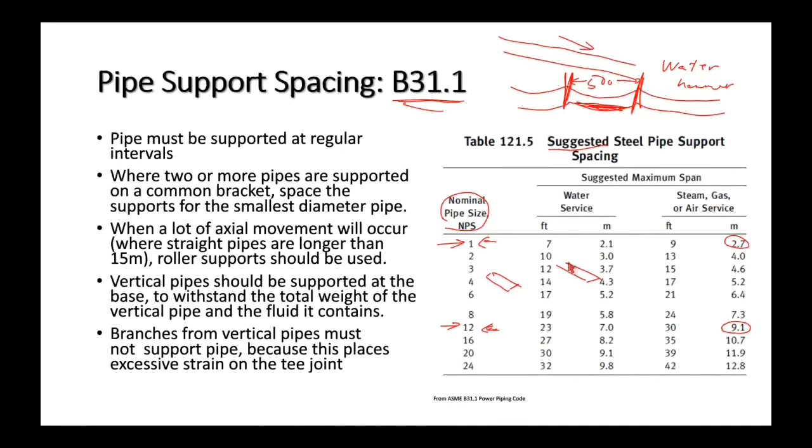So what happens if we've got some pipe runs? I've got these flat supports with threaded rod going to beam clamps, and say I've got a 4-inch pipe being supported there, and also a 1-inch pipe along the same supports. So the 4-inch and 1-inch pipes are both on the same tray, if you will. Well, then what we do is set the interval, the spacing between those supports, to accommodate the smaller size of pipe. We just accommodate the weakest of the pipes.

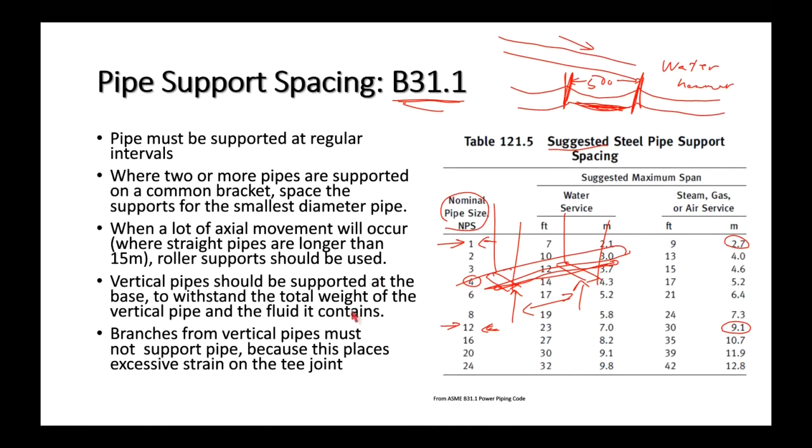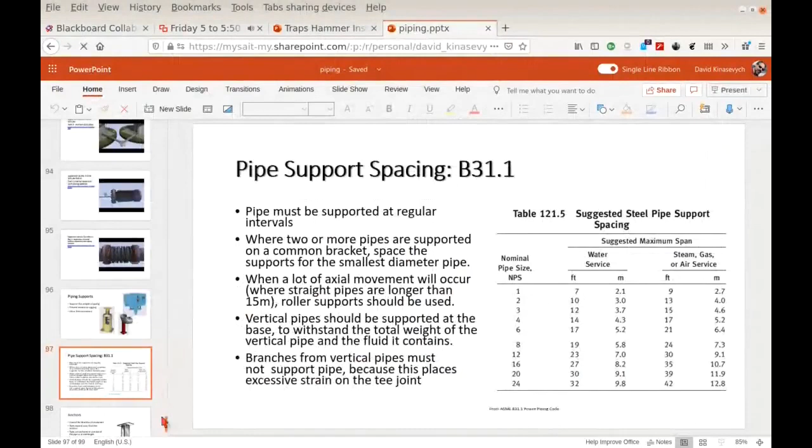There's an anchor. We know about anchors, we saw the video, so I'm not even going to talk about anchors and guides. I think those videos we looked at did a really good job of that stuff, so I'm not going to go over it anymore. You can rewatch the videos, those little 1-minute videos.

And that's it for piping. You should know the purposes. Why do we have steam traps? Of course, we want to discharge accumulated condensate, but we also need them to vent non-condensable gases. Those non-condensable gases are air on startup and also CO2. And some people might wonder, well, where the heck is the CO2 coming from?

Let's say we've got a sodium zeolite softener, Na2Z, and what happens is we've got dissolved solids, scale-forming compounds, entering the sodium zeolite softener. Let's say that happens to be magnesium bicarbonate, MgHCO3 twice. What we end up with is the non-scale forming compound: 2 NaHCO3. That's sodium bicarbonate, that's baking soda. It doesn't form scale in the boiler, but the bicarbonate decomposes in the boiler to form CO2 gas.

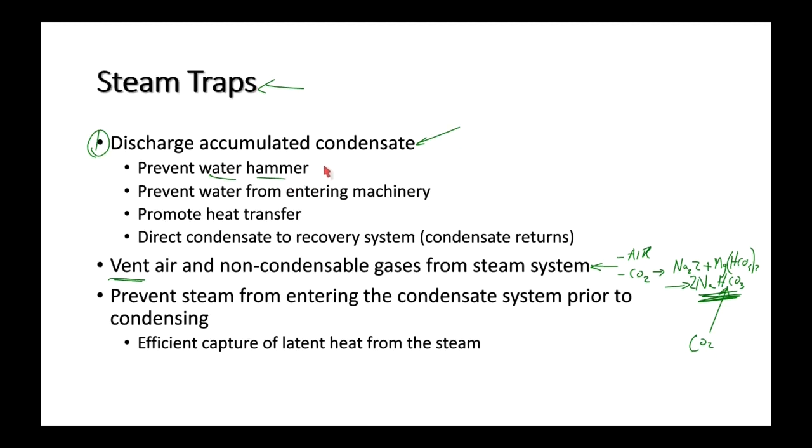So let's take a look at this again. Let's go back to number 1, discharge accumulated condensate. What happens if we don't? Well, we're going to get water hammer, okay? Water hammer occurs whenever we've got saturated liquid and saturated gas together in that same pipe.

Now then, the next thing is we want to prevent water from entering machinery. So let's say the condensate is a slug of water upstream of a turbine.

Break the turbine. Now, promoting heat transfer: if we don't remove condensate, let's say I've got a heat exchanger here, and I'm going to put some steam in there, and it's a shell and tube heat exchanger, so I've got a whole bunch of tubes. And that steam is going to condense and give off its latent heat, and then we want the condensate to leave. But what happens if we don't remove the condensate as it forms?

The condensate builds up and builds up, so that instead of having 100% of the heat transfer surface in service, we end up with 70% of the heat transfer surface in service, and then 50, then 40, and 30. Before you know it, we've got this thing full of condensate, and it's just not transferring heat the way we want it to. So we want to maximize the heat transfer surface all the time, and if we're not removing the condensate, we are going to diminish the heat transfer.

Now, what do they do with the condensate? It goes to some kind of recovery system, and maybe we could add this as an altogether different thing, but you see, condensate recovery is very important because it's basically pure water. As such, it makes very good boiler feed. So we want to recover it.

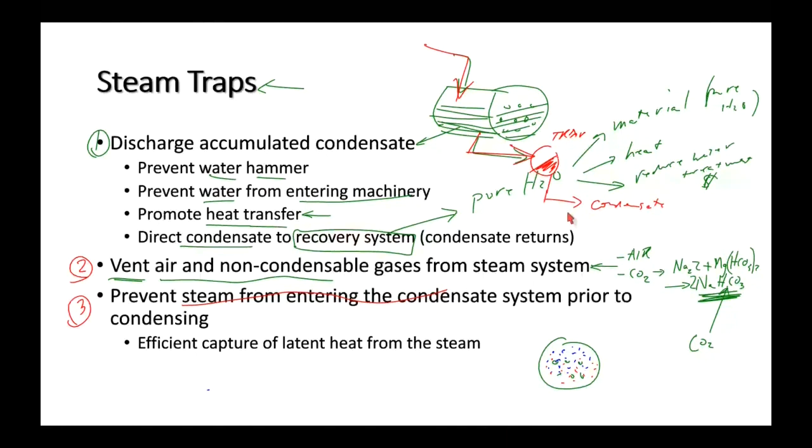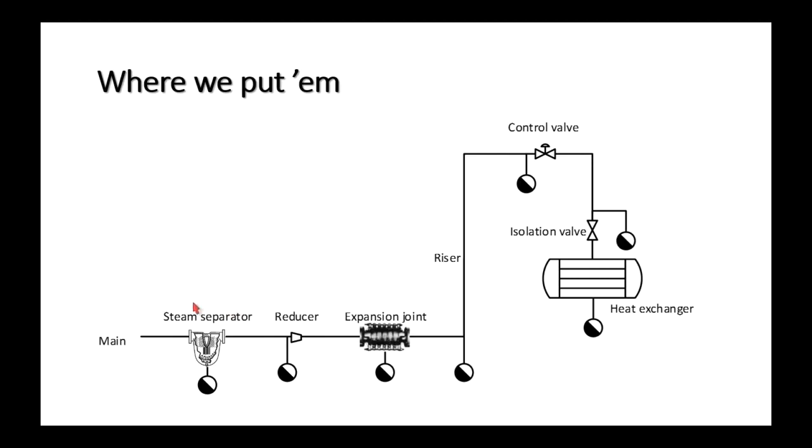So that's the long and the short of it, of why we have steam traps, what they do, and why we need them. I'm not going to go into too many details, except we're going to take a look at some of those operating principles in detail and see how each one of these traps maximizes and works on those particular concepts.

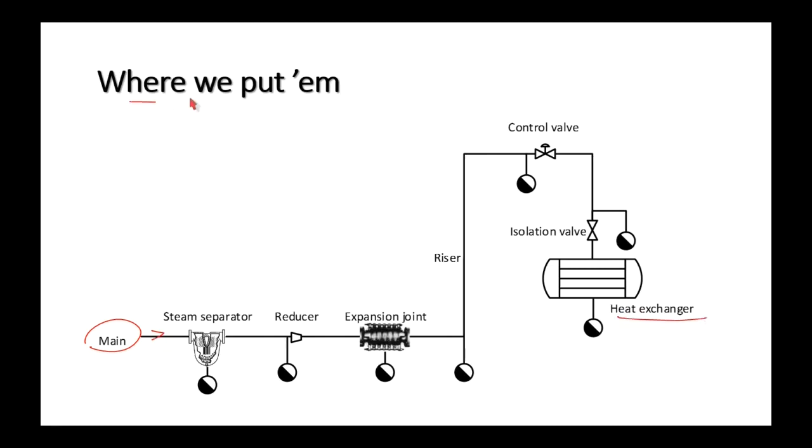So here's a steam main, the steam's going that way, and we've got a heat exchanger over here. So where do we put them? We put them where we've got a steam separator. Let's say I've got 95% dry and saturated steam going into the steam separator, and leaving the steam separator, maybe I've got 98% dry and saturated steam. What happens is the steam separator is going to get a little bit of liquid buildup in it, which we want it to do. So we're going to put a trap, and we're going to discharge the condensate from the steam separator. Very good.

Now here we've got a reducer, and reducers are pretty interesting because there are lots of different kinds. Let's say we've got a 4-inch NPS4 over here, and here we have a 2-inch steam pipe. So we have this fitting. And I got to tell you right now, we don't want to do that, because condensate is going to form a pocket right down there. So that's kind of no good. What we really want to do is take a 4-inch and have an eccentric reducer.

It's a little bit of a different fitting. Instead of having the pipes on a common center line, what we have is the 2-inch pipe down here on its center line, and the 4-inch pipe center line is a little bit higher. What we have is a smooth bottom that will not collect condensate. That being said, you will find concentric reducers in your piping systems on your steam lines, and you're going to go, who is the idiot that put a concentric reducer there? That's wrong. But if they are there, you can solve it by sticking a trap over here where the condensate could collect.

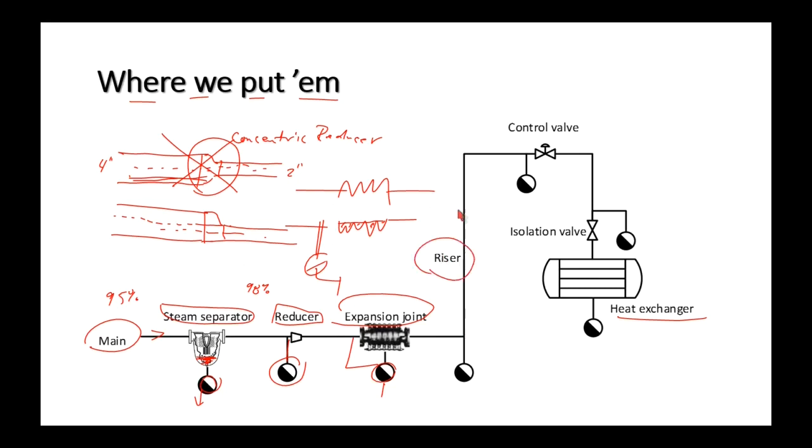Where else do we find them? Here's a riser. And at the base of a riser, we have this thing that we call a drip leg. That's terminology you probably should know from last year, but if you don't, now you know what a drip leg is. At the base of the drip leg, we're going to put a steam trap because, of course, as this pipe warms up, it's going to form a lot of condensate. Even in normal operations, there's going to be heat radiating. Even though it's an insulated pipe, we will see heat radiating from the pipe, and we're going to form condensate. We've got to grab it at the low point, which is the base of the drip leg, and again we discharge the condensate.

Now here's one: a control valve, or we could even say a regulating valve. Maybe we've got a steam pressure regulator. Just upstream of it, we're going to have a steam trap. So here it happens. Think of this control valve as being on-off, so it's either going to be open or it's going to be shut. Now, I know those would be the extreme conditions in terms of its modulating action. Maybe it's fully modulating, maybe it's open-shut, maybe it's a solenoid valve. I don't know, but regardless, it is some kind of control valve.

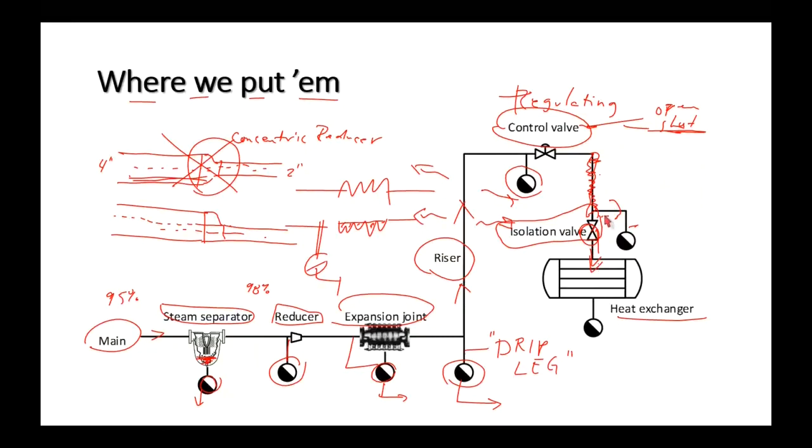Over here we have an isolation valve. If you're starting up the steam turbine powered boiler feed pump, you'll notice there are steam traps positioned just upstream of the isolation valve. Condensate will build up in this pipe, and if I open that valve, I'm going to have a slug of water wrecking the downstream equipment. We don't want that. So because the isolation valve may be closed at certain times, we want some way to collect that condensate and drain it out on an ongoing basis.

The last thing here, where there's a heat exchanger, we want to confine the steam inside of the heat exchanger, vent air out, and make sure only condensate leaves, but we also have to remove the condensate as it builds up. So yes, in heat exchangers, but also think of another piece of equipment you folks are running, a steam turbine. The steam turbine has casing drains at various locations to prevent condensate from building up inside the casing and demolishing the rotating blades. So here are some of the places where we put them and why.

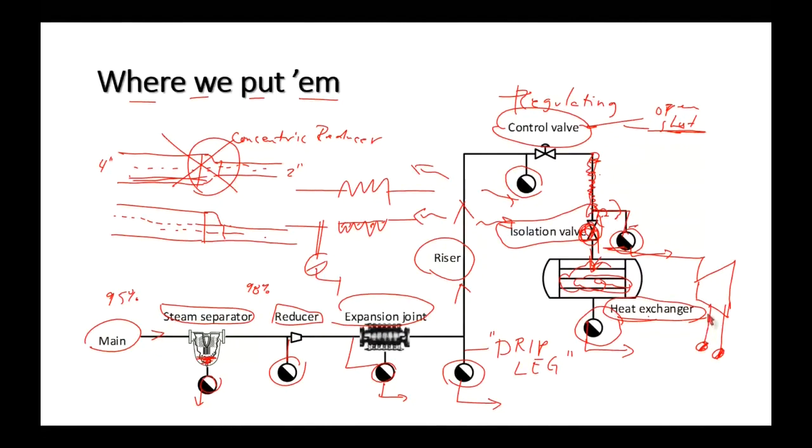Now as for operating principles, we mentioned in that Kahoot thermostatic, mechanical, and thermodynamic. This is a bit of a different approach. What we have is a sensing element. Think of instrumentation, think of a primary sensing element, and think what that sensing element is sensitive to. As for a thermostatic trap, we've got an element sensitive to a temperature difference between steam and condensate.

Now that is a bit of a problem, and the reason it's a problem is you think of steam and condensate being at the same temperature. If I've got steam at 200 degrees Celsius and that stuff condenses, what do I end up with? I end up with water, condensate at 200 degrees Celsius. Well, how can you have a thermostatic trap that is somehow sensitive to a difference in temperature? Well, there is no difference in temperature. 200 is 200, whether it happens to be steam or whether it happens to be water or condensate.

So in order for a thermostatic trap to work, the condensate has to cool off, it has to become subcooled. So maybe then we have a trap that opens at 180 degrees Celsius. That is the temperature difference that a thermostatic trap works on. It works on this whole notion that condensate must subcool for there to be a difference in temperature between it and the saturation temperature of the steam. Now it can actually differentiate: is there steam present, or is it only condensate?

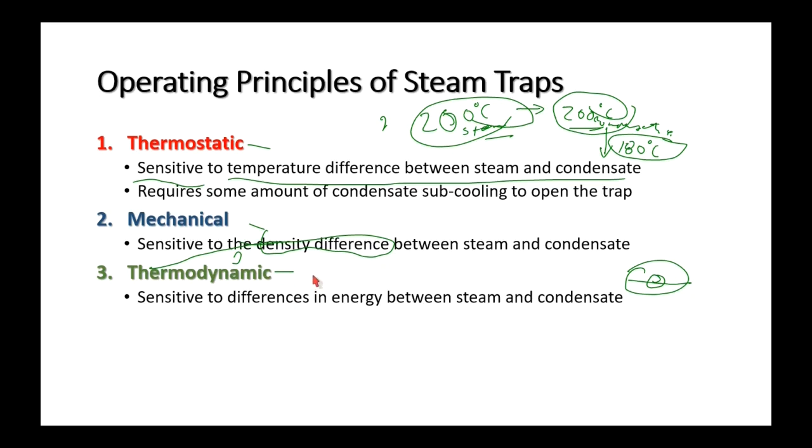Okay, so here are all thermostatic traps, and I'm going to use red here indicating that it's thermostatic. So what we're going to look at is a bellows type of trap, the liquid expansion trap, the bimetal trap, and the balanced pressure trap. Now, of these, the balanced pressure trap is not in your Pan Global, but it's very, very important and you need to know about it. Also, the liquid expansion trap will be new to you, but that one is in your Pan Global.

Both of these are related to each other. If we take a look at the pictures, this one here is the one that's in your Pan Global - that's the liquid expansion. This one over here is not in your PG, but that's the balanced pressure. And then this one here is the radiator trap. What all of these have in common is they all have some kind of a bellows or a pressure capsule. So keep this in mind: if a trap has a bellows, it is susceptible to water hammer. If water hammer occurs in the body of the trap, it will destroy the trap.

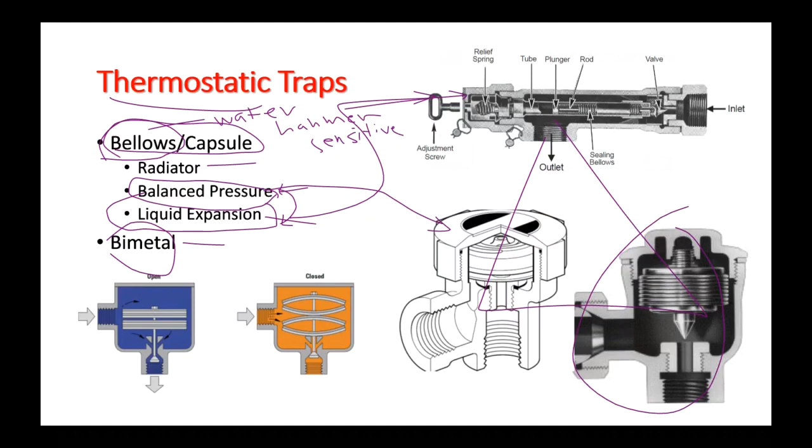And I'm back to writing with my mouse. So, water hammer sensitive - okay, I've got to find a smaller word, because otherwise it'll take me an hour to print it out with my mouse. Now, the bimetal is another type of thermostatic trap that in fact is not water hammer sensitive. So we'll take a look at those ones too, and we'll clarify some of the misconceptions about those. So here is the basic radiator type trap, bellows trap.

I don't think I need to go over this much, right?

So what we have is some kind of fluid inside that bellows, and that fluid expands when it's hot and shuts off this valve down here, and when it's cold it contracts and opens up the valve. Cold means condensate because it's been subcooled, and hot means it's surrounded by steam, which is at saturation temperature. Very simple trap, but like I said, it's got a bellows, so susceptible to water hammer.

It's fairly easy to service because there's a bonnet here, so it's threaded, and you can unthread it and pop out the pressure capsule or the bellows, and you can replace that for a certain amount of money, but it may not be worth it. You might just replace the trap altogether.

And then it does have a removable seat down here, which is also threaded. So maybe the more expensive ones are serviceable, but the smaller ones are just kind of like throwaways.

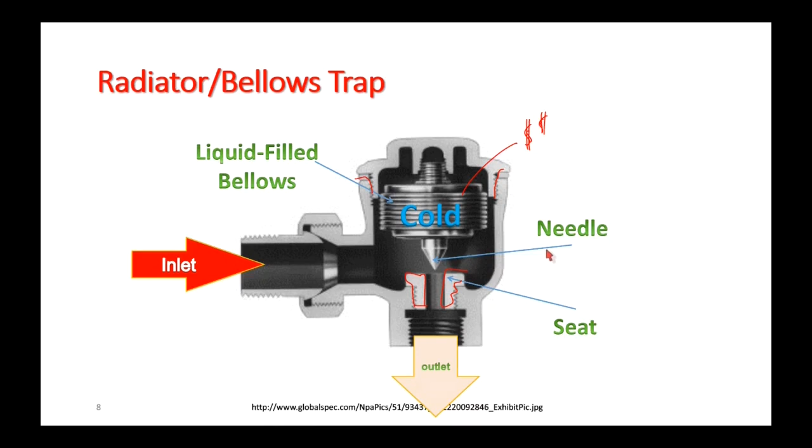Now, this bellows here, does this trap fail open or does it fail closed? And the answer is yes. It fails open or it fails closed, one or the other, and it depends upon the kind of bellows. As a matter of fact, when you buy these things, you have to order the type of bellows. You have to specify, do you want it to fail open or do you want it to fail closed? Failing open is usually the most desirable thing. Better to waste steam and energy than to have condensate backup.

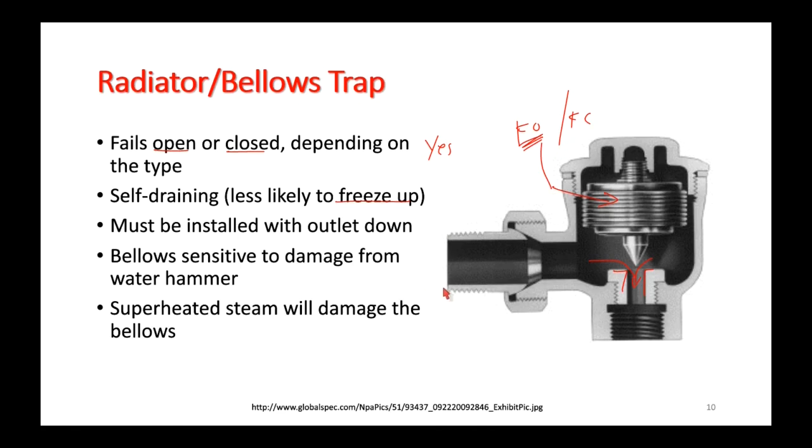Now they're always positioned with the orifice at the bottom, which means that they tend to drain automatically, which is a good thing because if it happens to be in a cold environment, it's less likely to freeze up. And that's basically our radiator or bellows trap.

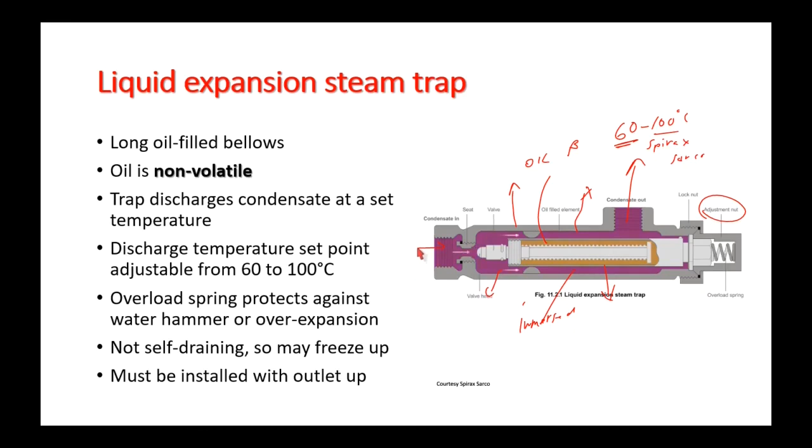So by adjusting this, we can actually control the discharge temperature. We can set it between 60 and 100 degrees Celsius, which is a real problem, because we're going to take a look at this one here. It's got a slide. Let's say that we have it set to 90, so this one's going to be set to a 90 degree Celsius discharge temperature.

Oil has a known coefficient of volumetric expansion, and so what that says is it has a fixed temperature response line. It will always discharge at 90 degrees Celsius.

But if we take a look at steam, steam's a little bit different. Steam has a temperature, saturation temperature, that varies with pressure. So as steam pressure increases, the saturation temperature increases. So this line here is our steam saturation curve, with increasing pressure and increasing temperature.

So let's say we're down here at P1, maybe this is 150 kPa gauge. At 150 kPa gauge, we've got condensate forming here at, say, 115 degrees Celsius. That means we've got a particular delta T, and so it has to subcool from 115 degrees Celsius to 90 degrees Celsius before the trap actually opens. So condensate is going to be this warm, and then the condensate has to cool off below 90 before the trap actually opens. So the subcooling then would be, what, 25 degrees of subcooling has to occur.

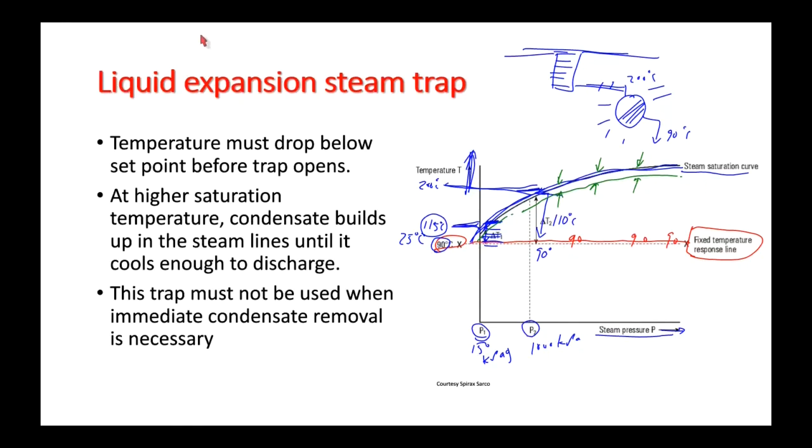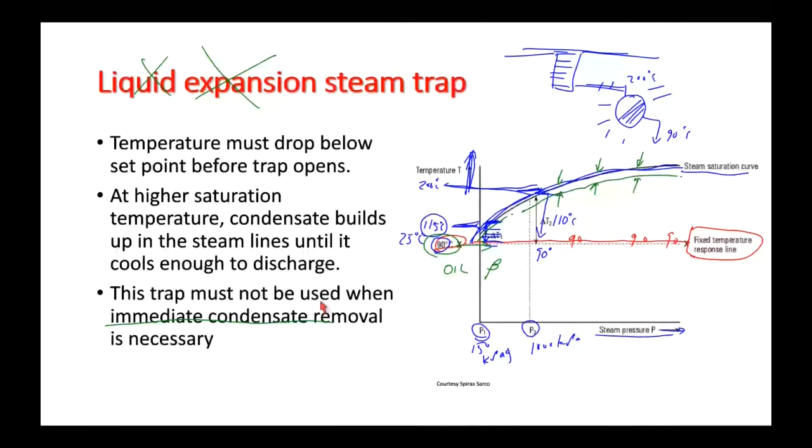It's kind of a bummer because it's got this low fixed temperature. Why does it have the low fixed temperature? Because it's filled with oil, and oil has a specific coefficient of volumetric expansion. So this type of trap is never used when we need immediate condensate removal. But what we can do is use it as a startup trap and as a shutdown trap, and that's where we see it.

So here's our steam main. We've got steam flowing through it. During startup conditions, we make a lot of condensate - maybe so much that this poor little trap here is overwhelmed. But the condensate is going to be relatively cool. When we first put steam in this line, the condensate is going to be 100 degrees Celsius when the steam main is at 100 degrees Celsius.

So in other words, when we're just filling it up with steam, we're making lots of condensate, and the condensate is pretty cool. We're going to discharge at 90 degrees Celsius. So the liquid expansion steam trap is going to be great for us. It's going to pass a lot of the condensate that forms, and it's going to help out this poor little trap over here.

Then as the steam pressure increases, and so does its temperature, maybe we're at 150 degrees Celsius, then we're going to have condensate at 150. This trap here is going to start to back up condensate because of the subcooling that it requires. And as it backs up condensate, this trap comes into play and handles that condensate alongside this one here.

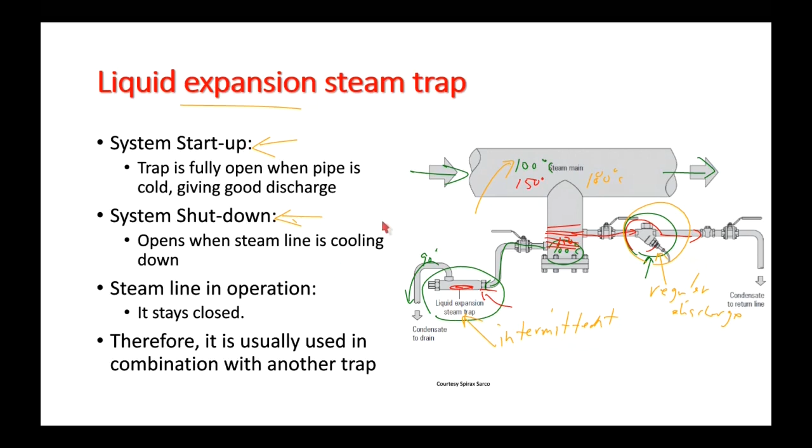So to summarize, when do we use these? We can use it in combination with another steam trap that is not a liquid expansion type, and we can use it for startup - a startup trap. We can call it a shutdown trap. I've gone into far more detail than the Pan Global goes into, because the Pan Global, as far as I'm concerned, will just leave you with questions, and hopefully this has answered some of your questions.

Now, the balanced pressure trap is the same as a liquid expansion trap, except for two things. Number one, it doesn't have an adjustable discharge temperature. And the second thing is the bellows inside, the pressure capsule, is filled with a volatile liquid. So because the liquid is volatile, it will respond to the pressure and temperature of the condensate.

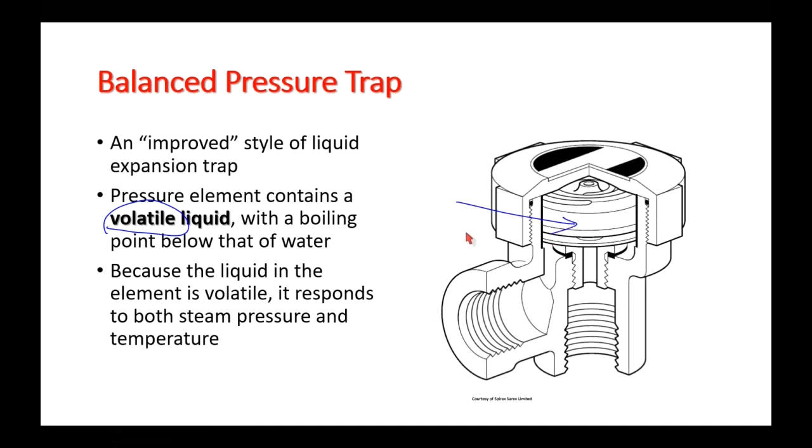So that's the pressure capsule right there, and that's our temperature sensitive element. Here's how it works. We get some cool condensate right now, so it opens up and discharges until hot condensate surrounds it. And then after it cools off, it opens again.

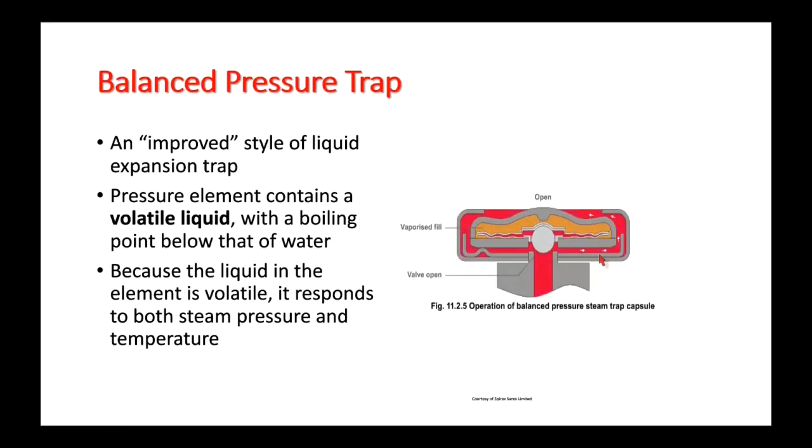Now, as for the response line, this one actually does have a response line that corresponds fairly closely to the steam saturation curve. So it doesn't matter whether we're at low pressure warming up the pipe. What we then have is, say, 15 degrees of subcooling. And as the pressure in the pipe increases and the saturation temperature increases, again we've got 15 degrees Celsius of subcooling. You get the idea.

This one actually responds to the steam saturation curve because it's full of a volatile liquid instead of an oil with a fixed coefficient of volumetric expansion. So some people call this the improved liquid expansion trap.

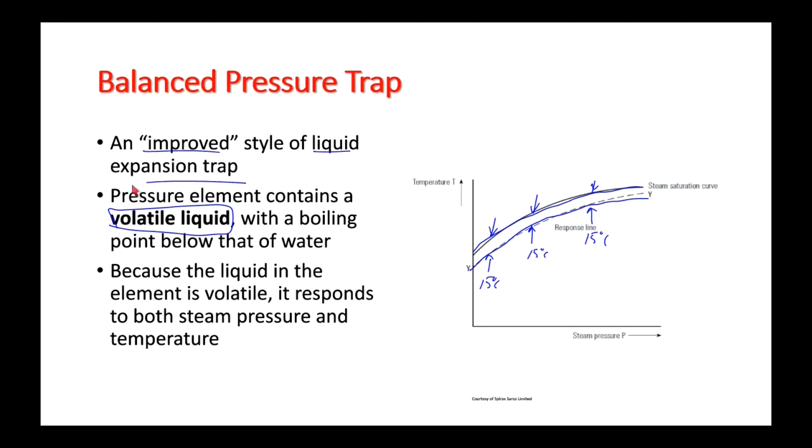Now the next is the bimetal trap, and Pan Global kind of slags this. What Pan Global says is, the bimetal is weak, and because it's weak, it doesn't close very well—it doesn't shut off tight. And who wants a steam trap that doesn't shut off? Part of their job is to trap the steam until it gives off its latent heat. But if this one is passing all the time, that's no good, right? So who wants it?

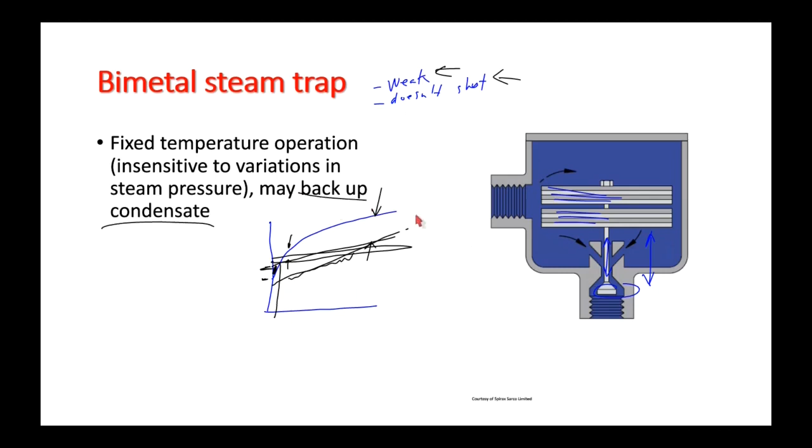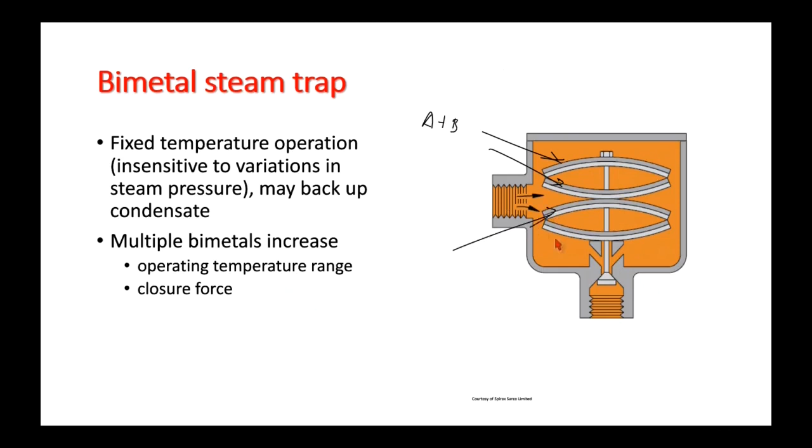But what we can do is, let's say these bimetals are of composition A, metals A and B, and we have other ones of a different composition, metals X and Y. They'll both operate differently. So what we can have is, if this is our saturation curve, metals A and B behave like that, and metals X and Y behave like that.

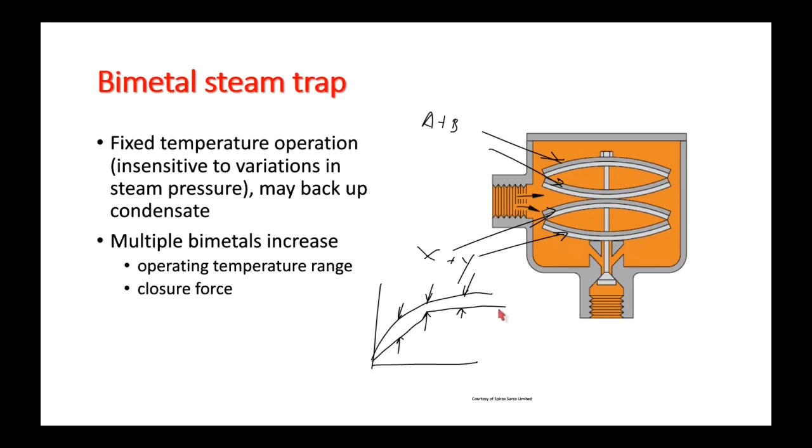Beautiful. So now what we have is, pardon me, they don't have a bellows, so they withstand water hammer—water hammer is not going to crush a bellows. They're fully open when they're cold, so they're good at venting air, and they're good at dropping a lot of condensate.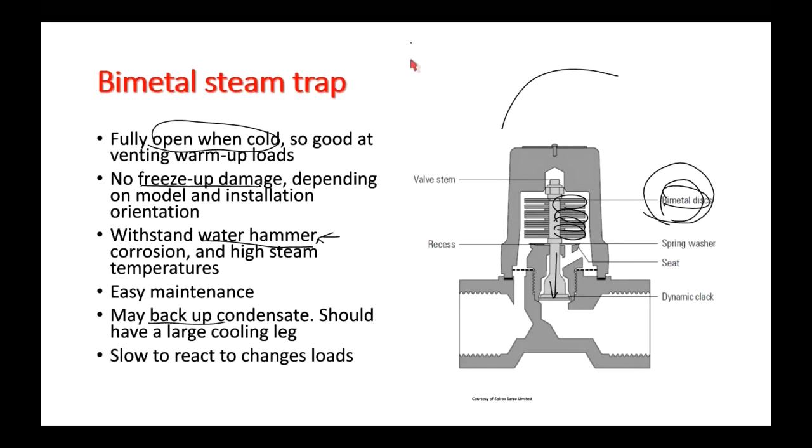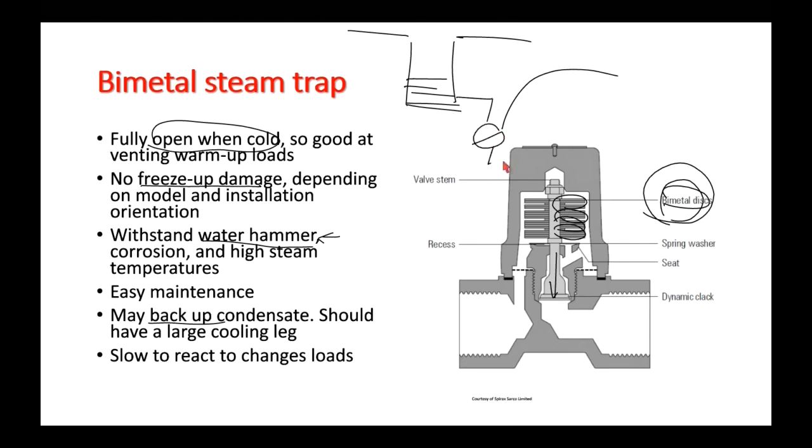They may back up condensate, but if it's a multi-bimetal type of design, it probably shouldn't. But just to be on the safe side, let's have a pretty big drip leg. The bigger the drip leg in the steam pipe, the more condensate can accumulate, so that a slow responding trap has a chance to catch up to the condensate load.